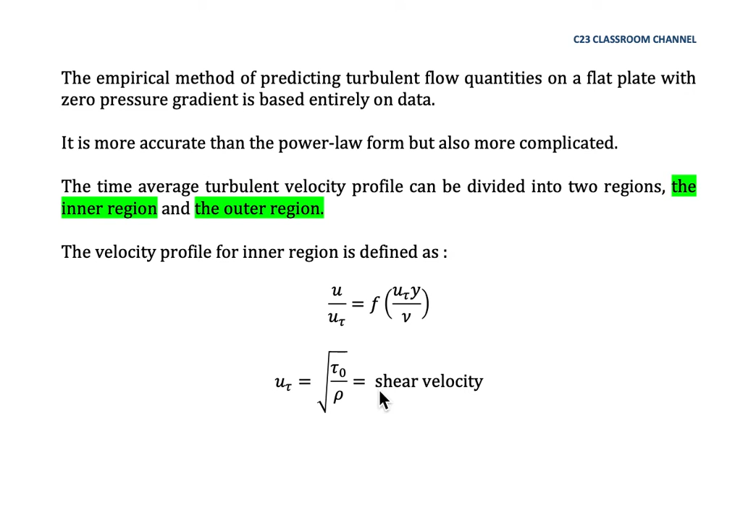The velocity profile for the inner region is defined as u over u tau equal function of u tau y over kinematic viscosity nu. So u tau here is equal to tau naught, the mean shear stress that occurs on the surface of the flat plate, divided by its density rho, to the power of 1 over 2, and we call this one the shear velocity.

So another one, we have the velocity profile for the outer region, and it could be defined as U infinity minus u bar over u tau, which is a function of y over delta, and we call this U infinity minus u bar the velocity defect. U infinity means the free stream velocity, equal to capital U. So the free stream velocity will slow down when it goes through the area near the flat plate, and that's why it has the velocity defect here, because the free stream velocity is slowing down.

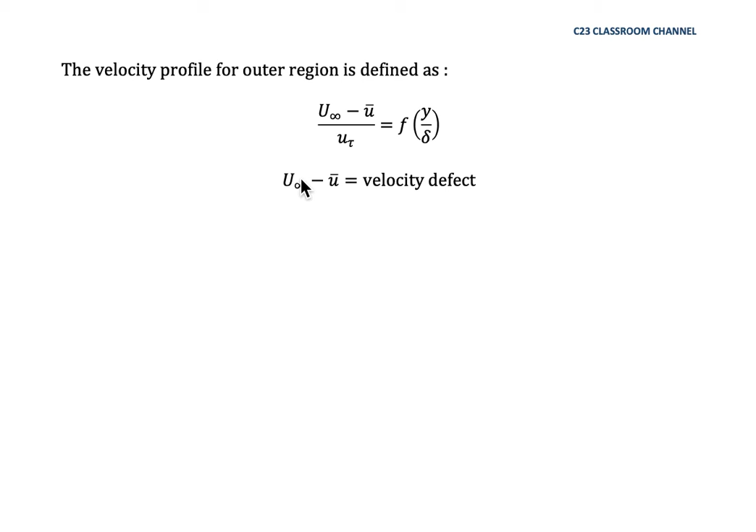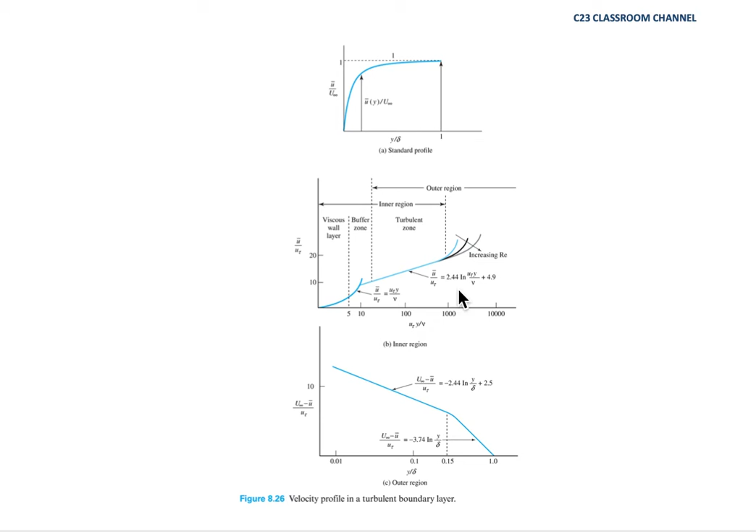So to simplify this calculation for this syllabus, it is okay for us to understand that from all the calculation that I show you above, we plot a graph, we have a curve fitting line and so on and so forth, and finally we could propose a few relationships, and these relationships are the most excellent result that we can use in our calculation.

So we could say that Cf, which is the local coefficient of friction, or sometimes called local skin friction coefficient, is equal to 0.455 divided by ln(0.06 Reynolds number) squared. So in this equation, you need to be very careful, because the natural logarithm here is for 0.06 times Reynolds number. So you need to know its Reynolds number, multiply by 0.06, then find the natural logarithm for this term. Then you need to square it.

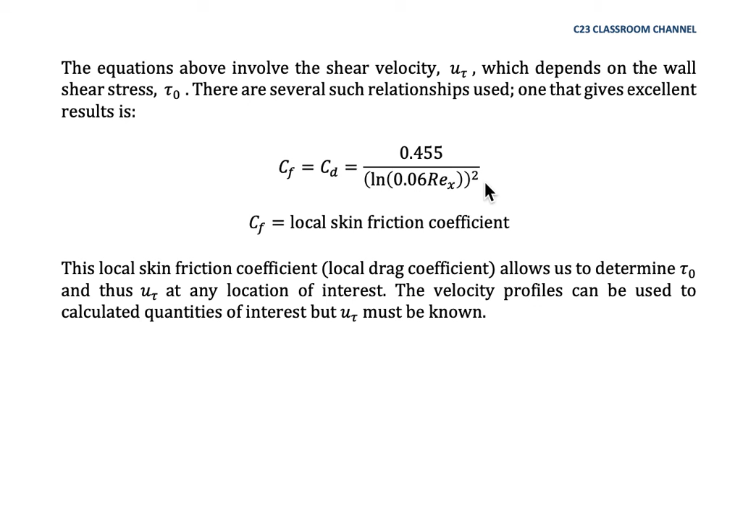And then for the drag coefficient, the total coefficient for that flat plate, it can be assumed as CD equals 0.523 over ln(0.06 Reynolds number) squared. So again, I would like to remind you, you need to solve this term first before you could get the value of ln here.

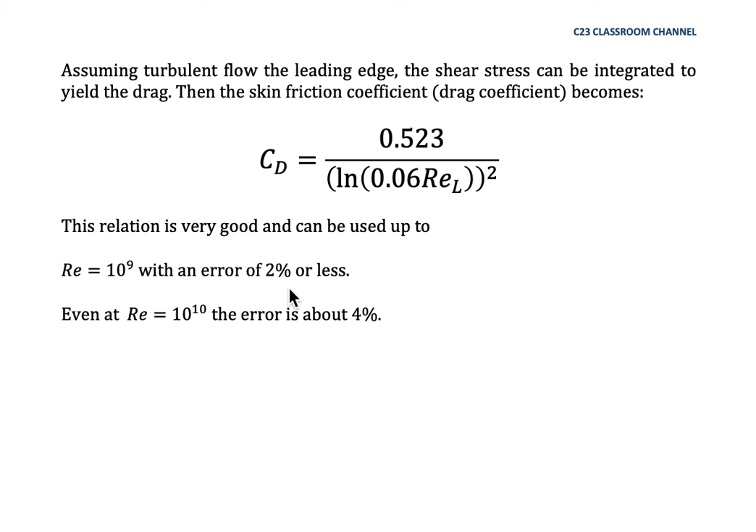So the difference between the empirical method and power law form is that the power law form is quite a rough calculation, and it will give you a little bit of error, might be less than 10% from the real one. But it is okay to use both of these methods because the turbulent boundary layer is quite rough. So the boundary layer thickness is not static at a certain height. It's different because the flow is turbulent.

And then this is the final equation that you need to understand and remember to solve the boundary layer thickness by knowing the shear velocity u tau. So U over u tau is equal to 2.44 times ln(u tau delta over nu), which is not velocity, this is the kinematic viscosity, plus 7.4.